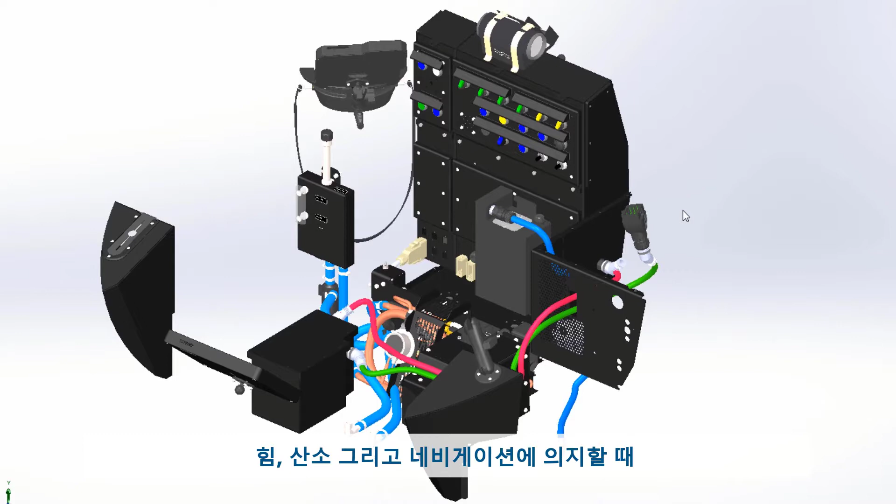When you go deeper into the beautiful unknown of the underwater world and rely on your power, oxygen, and navigation, electrical design plays a big role. In SOLIDWORKS, we bring multidiscipline engineering into one ecosystem.

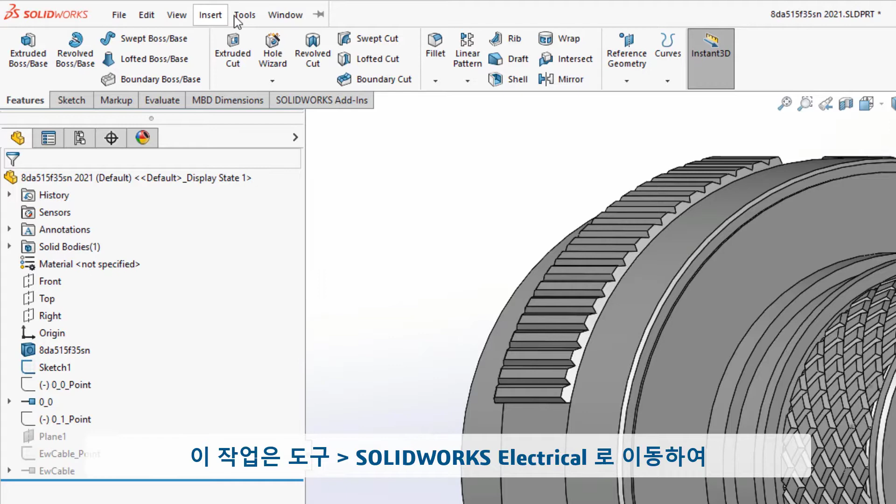Creating electrical information for a SOLIDWORKS part does not need to be a long, drawn-out process. Adding connection points in SOLIDWORKS became easier. They can be done inside SOLIDWORKS by going to Tools, SOLIDWORKS Electrical, where you can select Create CPoint from Manufacturer Part. In this dialog, it remembers the last manufacturer part that was used, or you can browse and select a different manufacturer part from an extensive library.

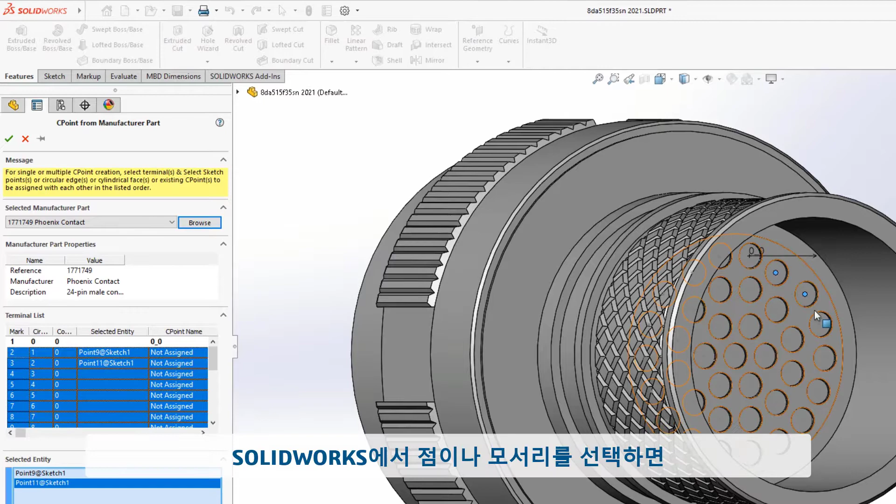The terminal list shows the list of connection points that need to be added. Selecting a point or an edge in SOLIDWORKS updates the table, and selecting OK will add these terminals to the part.

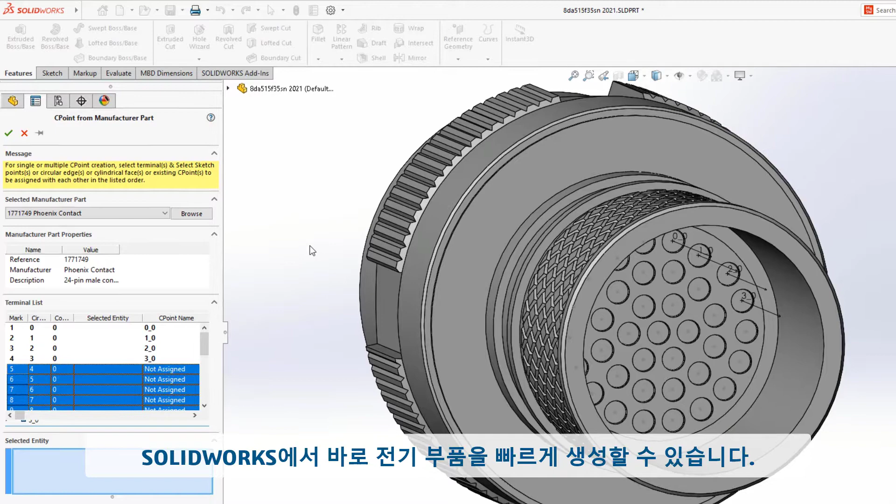Going back to Tools, SOLIDWORKS Electrical, Create CPoint from Manufacturer Part reveals what terminals already have been placed with the remaining list to do. The ability to select the point or an edge in SOLIDWORKS, to add the connection point with table updates, allows you to quickly create electrical components right in SOLIDWORKS. Less time creating parts and more time designing.

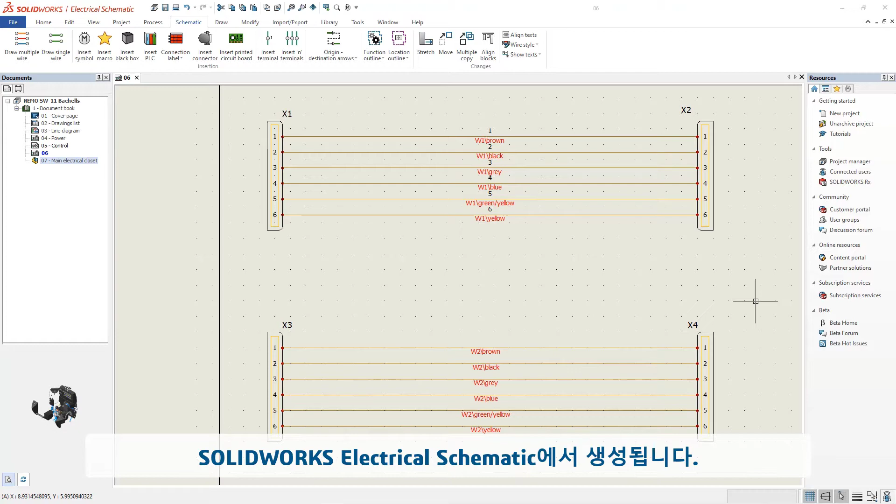How would you protect the junction between contacts and wires to eliminate electrical failures? Backshells are used, and SOLIDWORKS now supports them. Two harnesses from the battery to the control panel and external plug are created in SOLIDWORKS Electrical Schematic. In SOLIDWORKS, these two harnesses are routed. Now that the routes are in place, you can address the wires and contact protection.

Adding backshells to the connectors removes the stress between contacts and wires. Backshells are available in Design Library, Routing, Electrical, Inline Components. A 45-degree spin coupling was used and mated to the connectors.

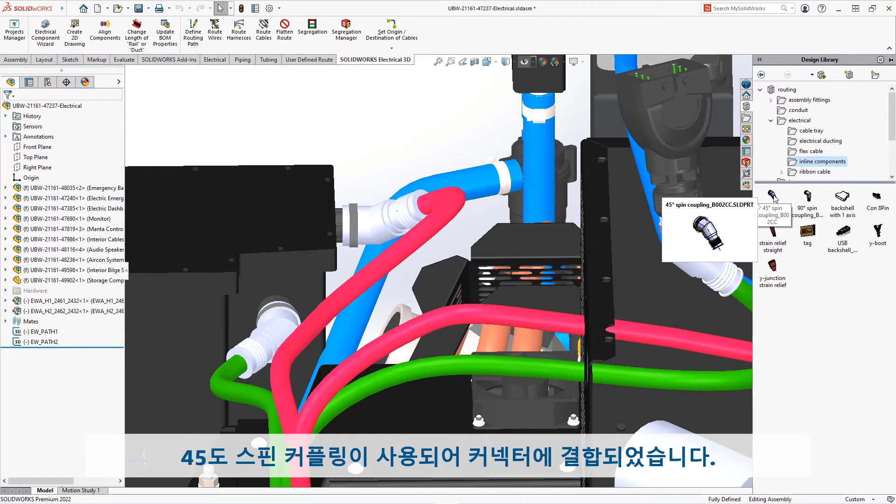One more connector with a backshell will need an adjustment of the harness to go through the backshell. Edit the harness that is in red and select the body of the backshell. From the right mouse button, choose Edit Route Alignment. Select the spline of the harness and then the axis of the backshell.

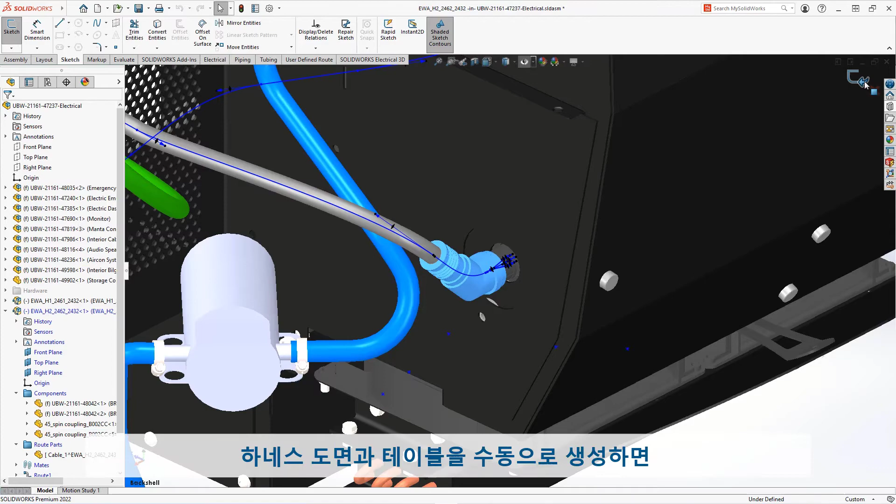Efficient use of backshells during design will protect the junction between contacts and wires, eliminating downstream manufacturing delays and costly redesigns. Creating harness drawings and tables manually takes time and can be error-prone. Flatten Route in SOLIDWORKS automates this process and now supports backshells.

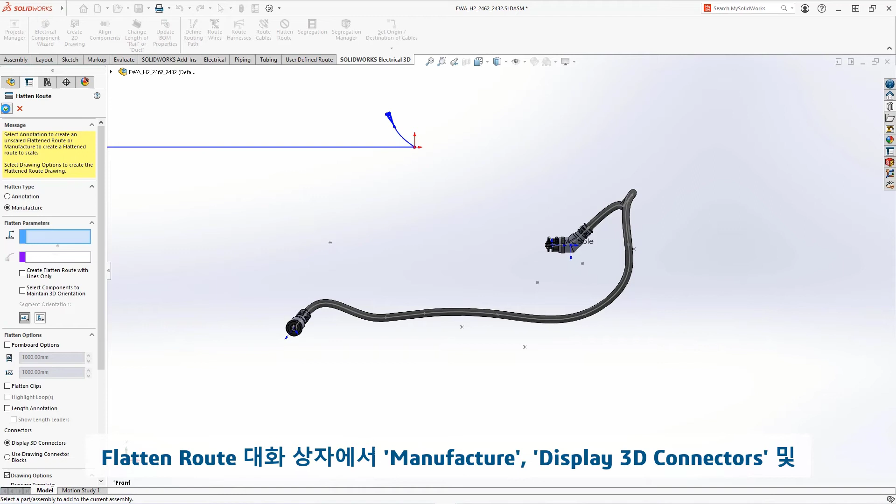Flattening this red harness will include backshells along with the harness and connectors in its 3D position, and will show them in appropriate locations. In the Flatten Route dialog, choose what detail of documentation you will need to include, like manufacture, display 3D connectors, and checkmark for drawing options.

Choosing OK does produce the harness drawing with connectors, backshells, tables, and callouts automatically, and saves time for engineers to tackle other technical challenges. The SOLIDWORKS ecosystem lets you quickly create electrical information for components, add and manipulate backshells for contact and wire protection, and create flattened harness drawings that include backshells.